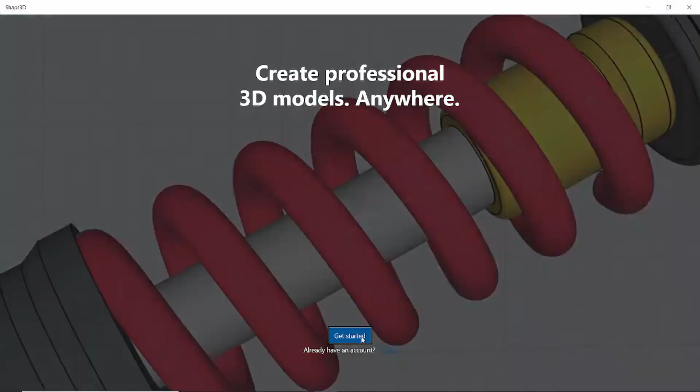Today I'd like to give you a very quick view into the beta version for Windows of Shapr3D. This software looks very new to me. It's still available for Macintosh and iPhones, but for Windows it looks to be brand new. Very nice is after the installation of the software, it starts up with a pretty nice tutorial.

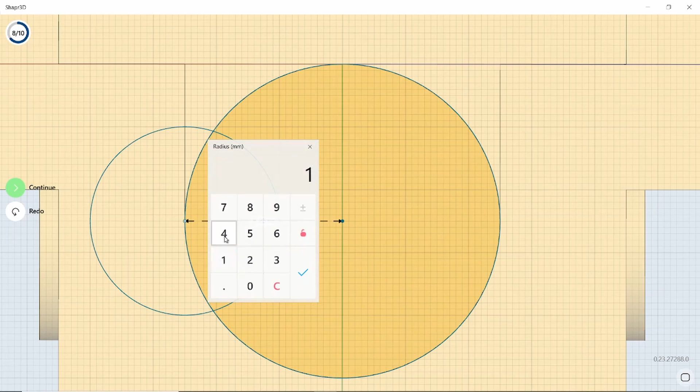It shows you how to move parts, how to draw new elements, how to extrude parts, and how to move 3D parts along your screen, how to add new elements into a system object, and to drill holes into objects and so on. So really a pretty nice tool. You see here also how to smoothen edges, and I will show you very quickly on an example how I design with a new sketch.

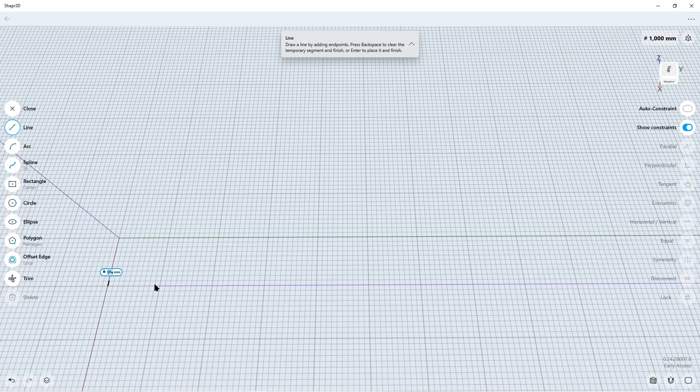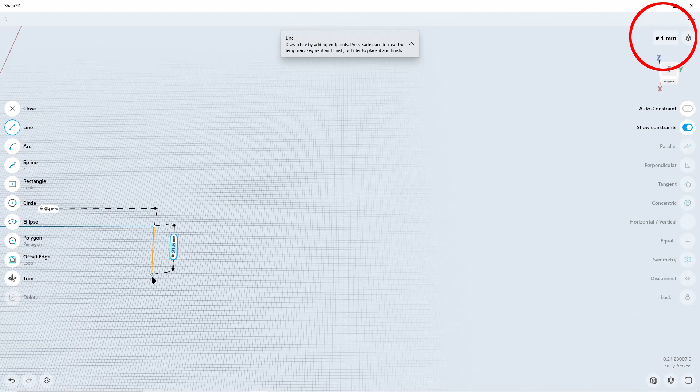A very little thing I need to replace because the original part is broken, and you see up on the top right side I have changed from meters to millimeters because that's the dimension I like to work in. My part is really a very small bridge element, which I need to replace.

And I thought that would be a nice idea to check out how quick it could be built up in Shapr3D.

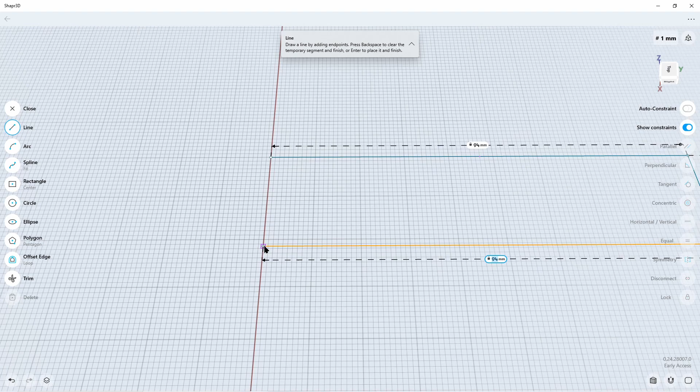So I take the line tool and draw in the right dimension the object I need to have, and you see here I have already now my basic element, but that's not enough. I can now extrude it by 3.8 millimeters. That's exactly the height I need.

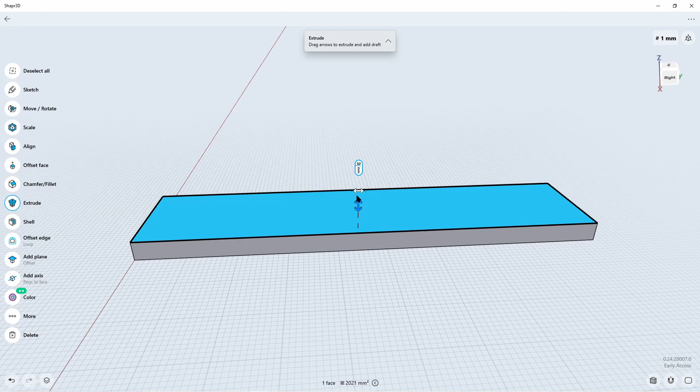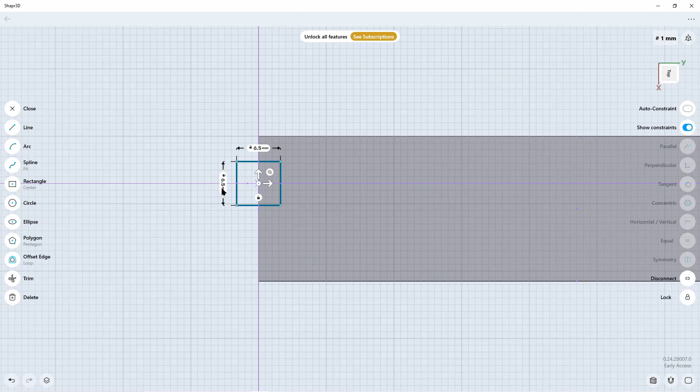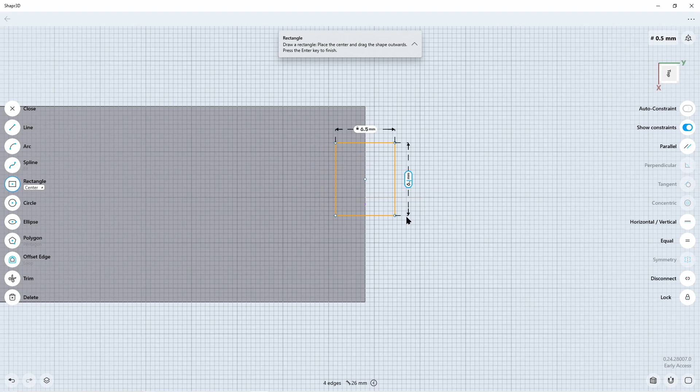The object needs a little bit more. So I need a rectangle tool to add some more elements here. I need a square with 6.5 by 6.5 on the left side, and you see here if you move it along the screen, it snaps into a very nice position. So it's automatically centered correctly. The same one I do on the right side, also 6.5 by 6.5, and again I move it along the screen, wait for the snap orientation, and as soon as it snaps...

It's placed correctly. Pretty nice.

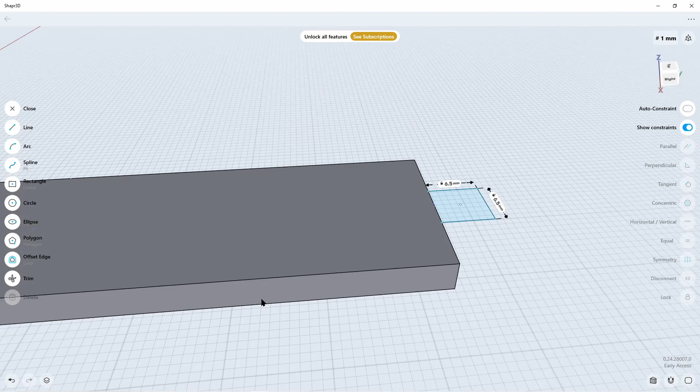So that's the part in its basic design. I need to extrude now the objects on the right and on the left, also at the moment with 3.8 millimeters.

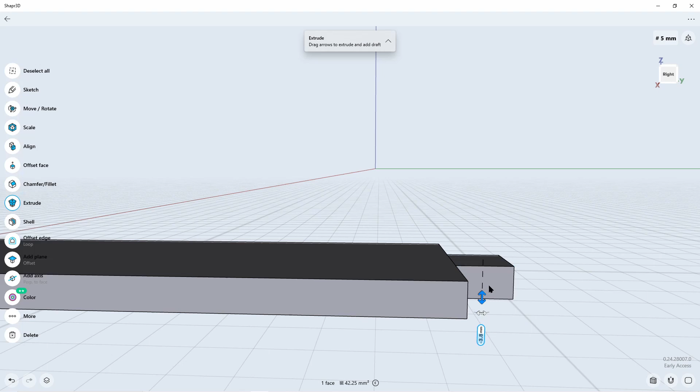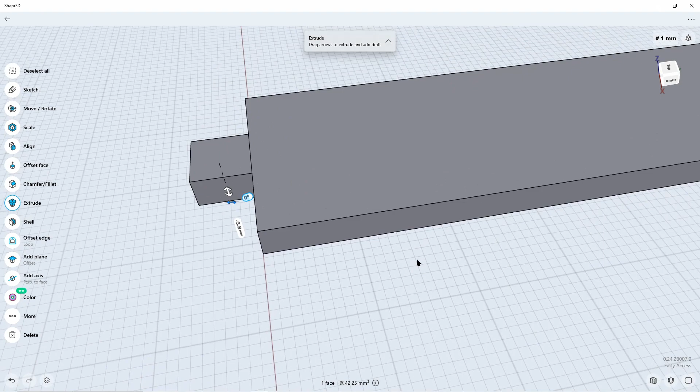And it's really easy to use if you see how quick it works. Let's have a look at the edges, for example. There are two functions for offset edge: the loop mode and the single mode, and you can make flat edges and round edges here in comparison.

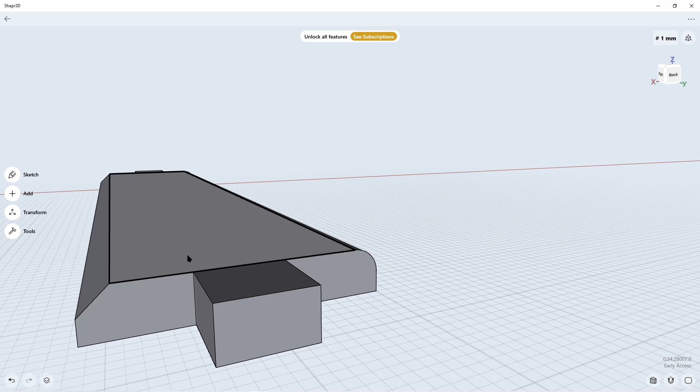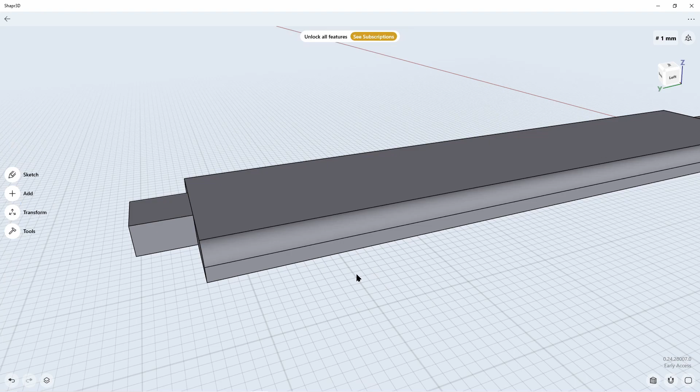Really easy, and it has the workability to handle or to paint new parts, like you know it, for example, for Tinkercad, but with much more functionality in my opinion. So it's a little bit somewhere between Tinkercad and Fusion, for example, somewhere in the middle, and really easy to use in my opinion.

So I will now make my round edges here, and I take on both sides 2 millimeters, click the edge, 2 millimeters, return, done.

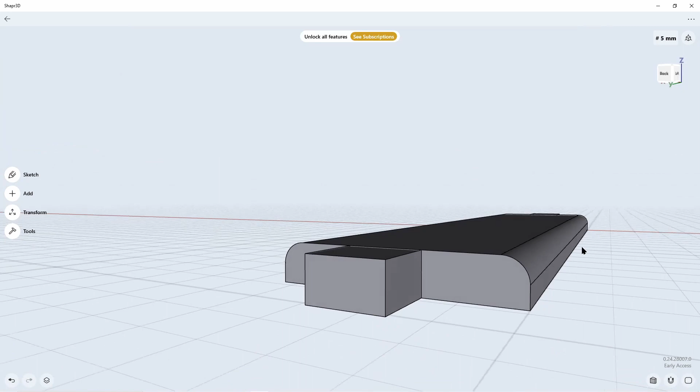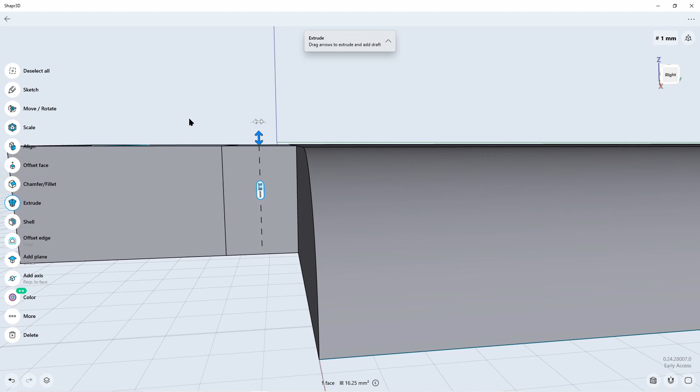Okay, looks good so far. So I need now between the square and the main part a little spacer with a height of 3.8 millimeters, and the square I have designed in the beginning. It needs to be 6.5 by 6.5 by 6.5 in the end, because I need that one as a connector. And I use the shell function...

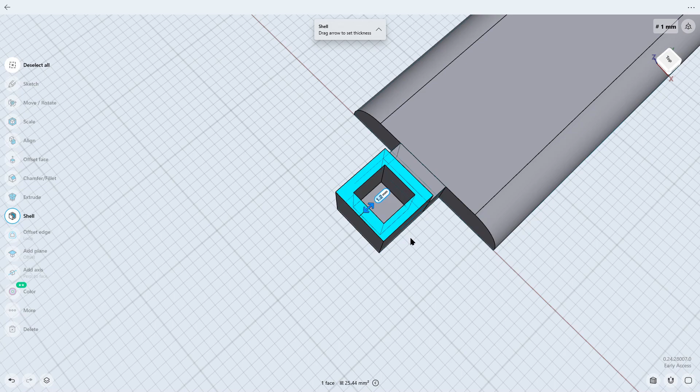...to not waste too much material, and because it's a connector it needs to have the right dimension. I'll do that on both sides, and that's it.

If you need more, you can use the standard or the business plan. But for my use of this tool, I think for the moment the free version is enough for me to play a little bit around.